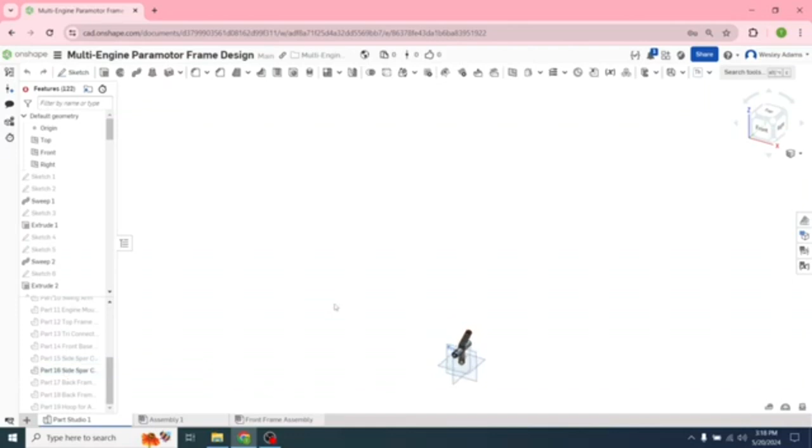Before we do the back frame assembly, let's go back to Part Studio. Let's go down, side spar connection still activated. We went in and changed where the bolt holes were last time. We're going to keep that, but I noticed that the color was off, so we're going to go Edit Appearance.

Let's change that to black, and when we go back to the front frame, you'll notice that all of these parts are now black. So this is just showing that if you change something in Part Studio, it will automatically update in Assembly View, as long as you've saved those changes here.

Let's right click on this, on Assembly 1. Let's go Rename. Let's go Back Frame Assembly.

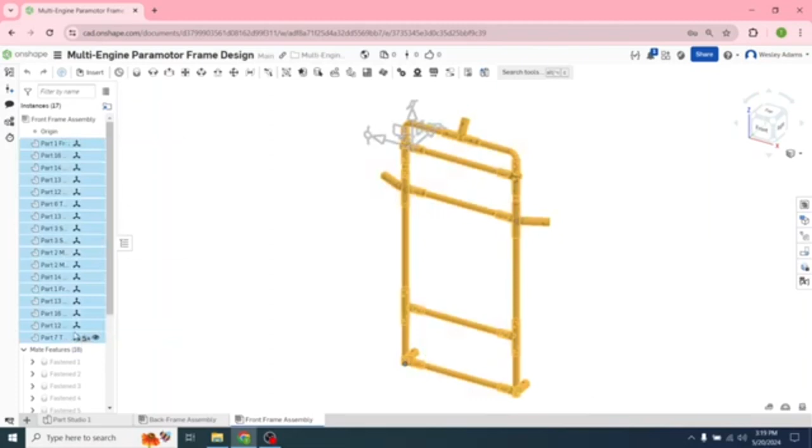Now left click, highlight all of these parts. That's one way to do it, or you could highlight over in the features. We're going to right click, copy 17 items. We're going to left click on the back frame, and paste the 17 items here. I want to be able to go back and create drawings just for the front frame, and I don't want to have to replicate the work. So we're going to save that assembly where it was at.

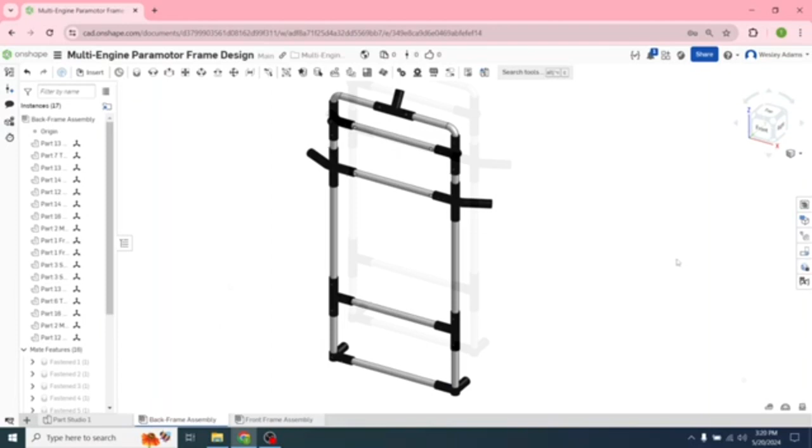So now we're going to build the back frame. Let's go Insert, Right View. Scroll down, and let's find the back frame tube. Let's just start with that.

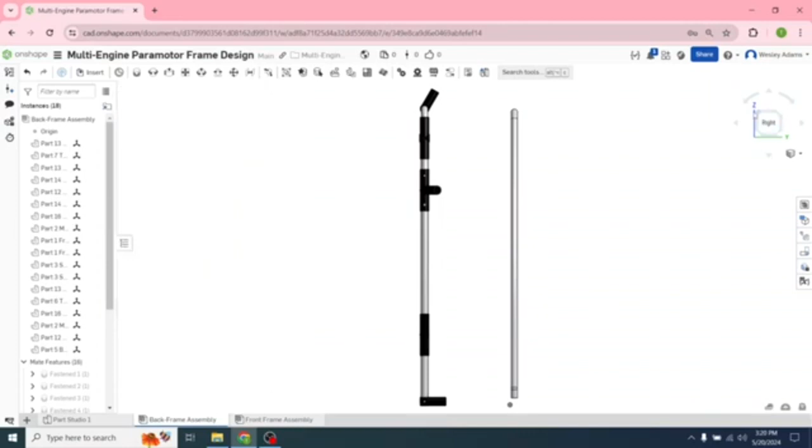Left click to insert it, close out the Insert tab. I'm just going to pull this over. Left click, holding down, now I'm going to click on that. I'm going to rotate 90 degrees. And I want to go back, right click, let's go to Isometric View.

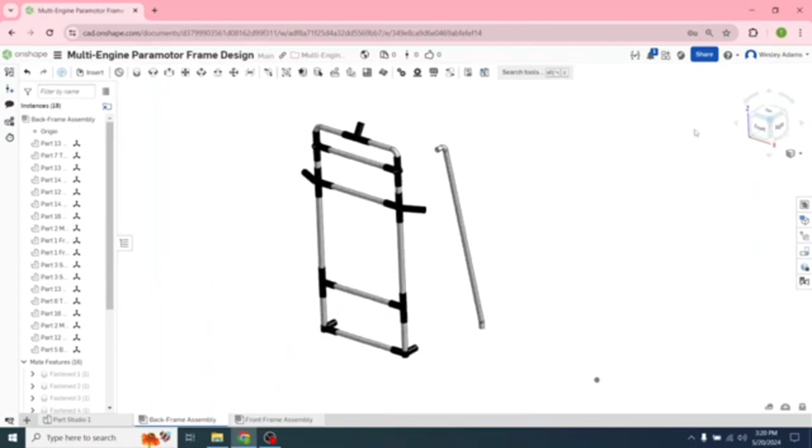Let's left click on the Fasten mate. Left click here, because we want that part to move to the frame. Left click here, and that should insert. Let's go over and see how far - yeah, so that's good, insert.

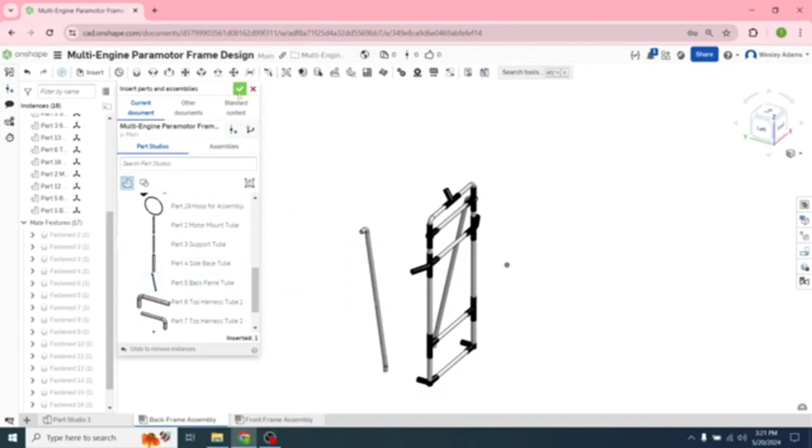Let's go back down, find that part again - back frame tube. Let's insert here, close that out, go to Top View. Drag that over. Left click on it, let's go 90 degrees. Close that out, yeah let's do it from here.

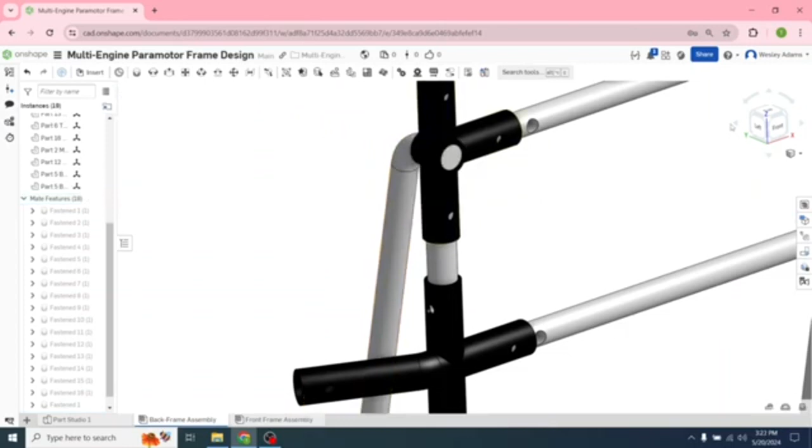Let's just try that without going in. Left click here, left click here, yeah, that's what we did. Close that out - that goes all the way up to where we want. And when we look at it from this side, you'll notice that it is where we want it to be.

We're going to go back in and change the length of this here in just a second. So let's go to Part Studio. This will be good practice to change parts.

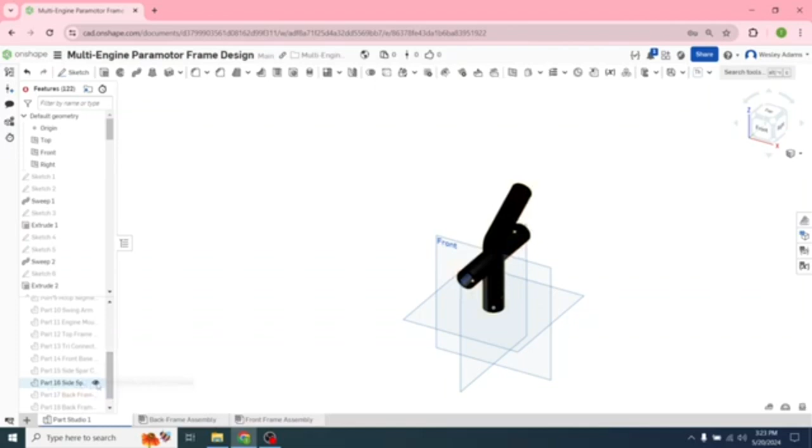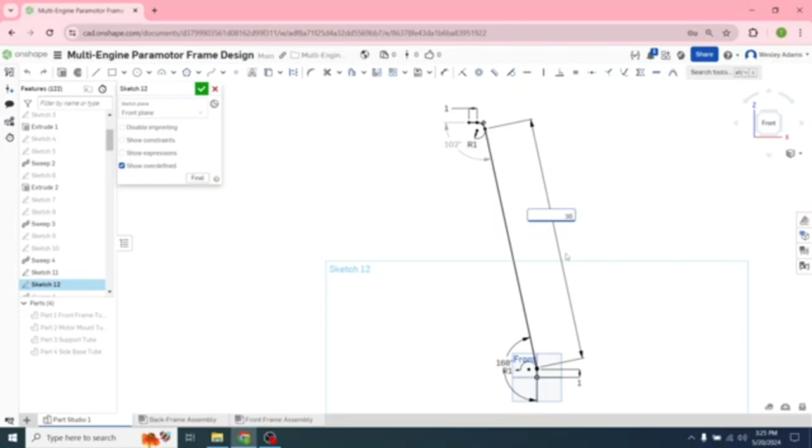Let's turn that one off. Let's go back up here to the back frame tube. Let's turn that on, highlight it so we can go and find the sketches. All right, there's our sketch. Let's go to Front View. We're going to change the length here to 30.75. Close that, let it save.

Back frame assembly - and that looks like that's just about touching the ground.

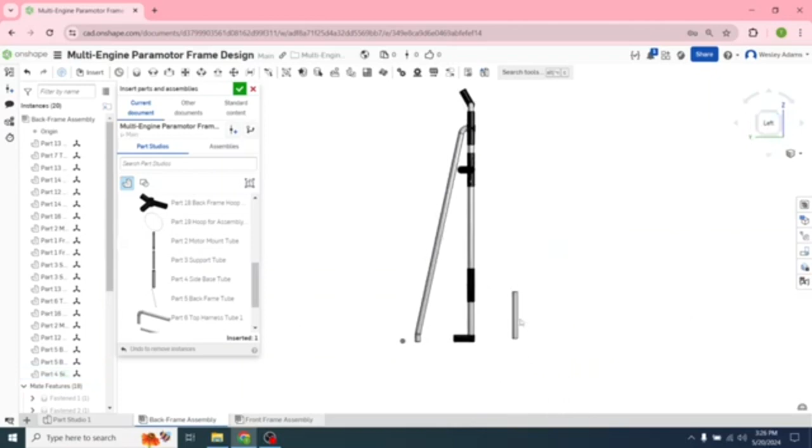Okay, let's insert this side base tube. Let's go Insert, let's go down and find it - side base tube. Let's bring it over here, Left View, bring it up here. Let's left click on it, close that out, left click. Rotate, let's go 90 degrees. Let's bring that over, let's go to Isometric View, zoom in so we can have a good look.

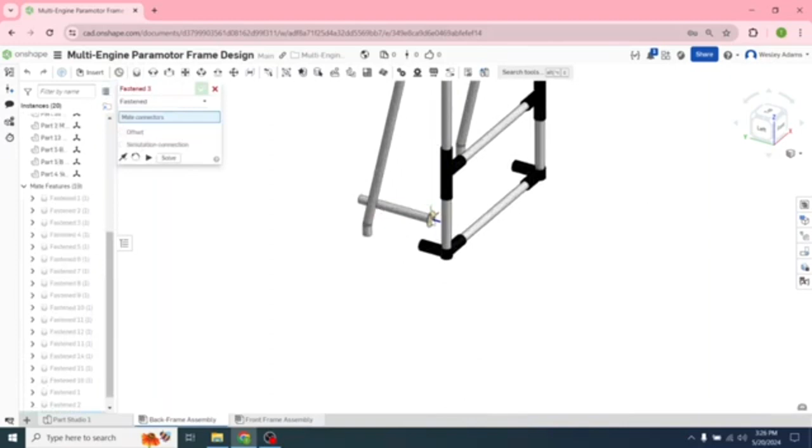Left click on the Fasten mate. Left click here, left click there. We're going to have to adjust that, so let's do our offset on the Z axis - 2 inches for now. Yeah, that's pretty good.

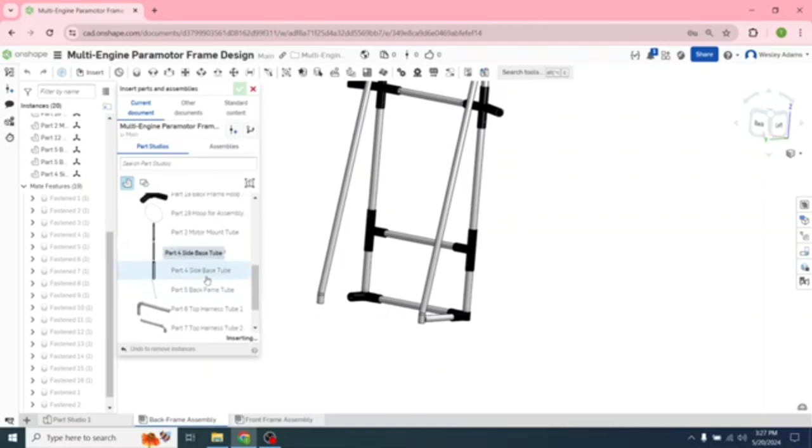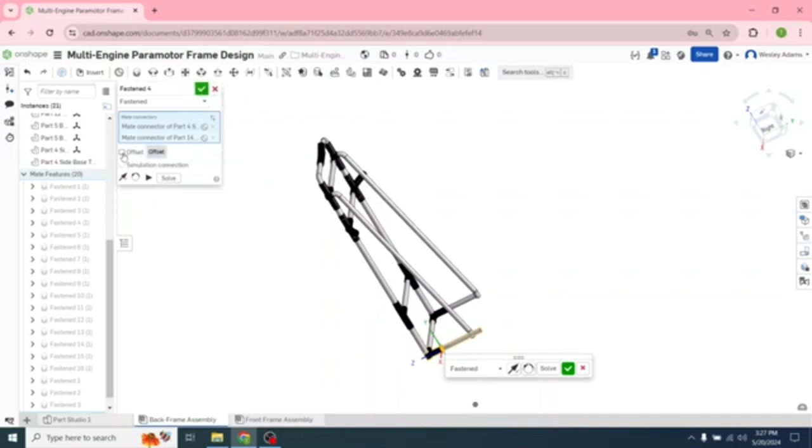Let's go insert, let's go side base tube again. Bring it in, close that out, rotate around. Let's go to right view so we can rotate it - rotate 90 degrees. Left click, bring it over here. Let's go back to isometric view. Left click, fasten mate, left click here, left click there. Let's go Z offset to 2 inches. And we've got that - all right, so it's starting to set up nicely.

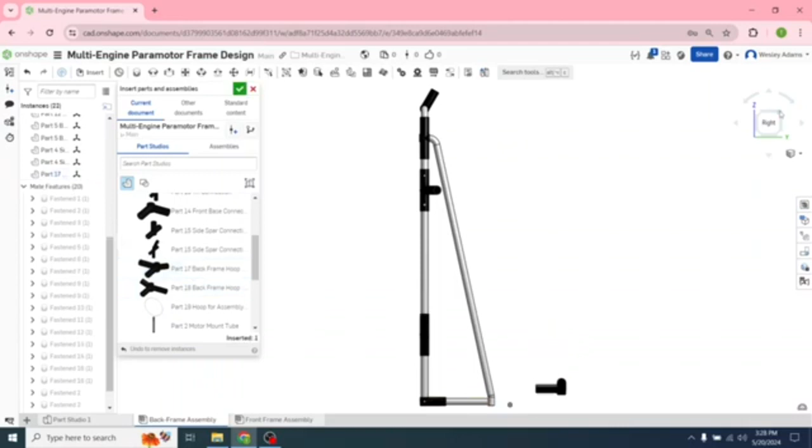Let's go insert. So one of these has to be on the left and one has to be on the right, so let's set this down. Close that out, go over. All right, this one is going to go on this side. So let's go to isometric view, let's just move it over there a little bit closer.

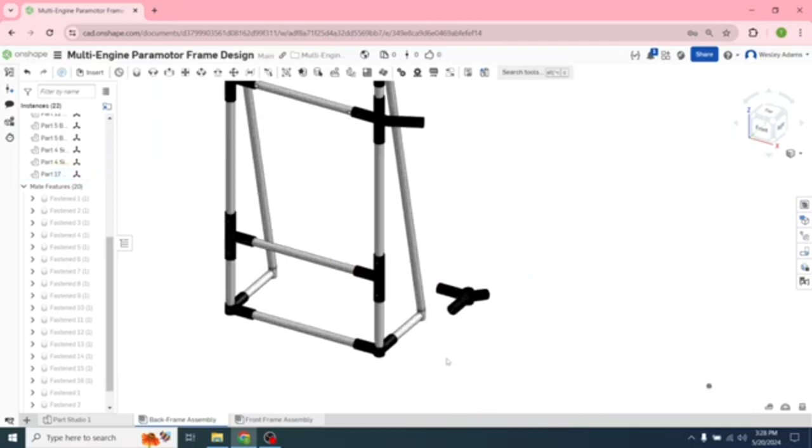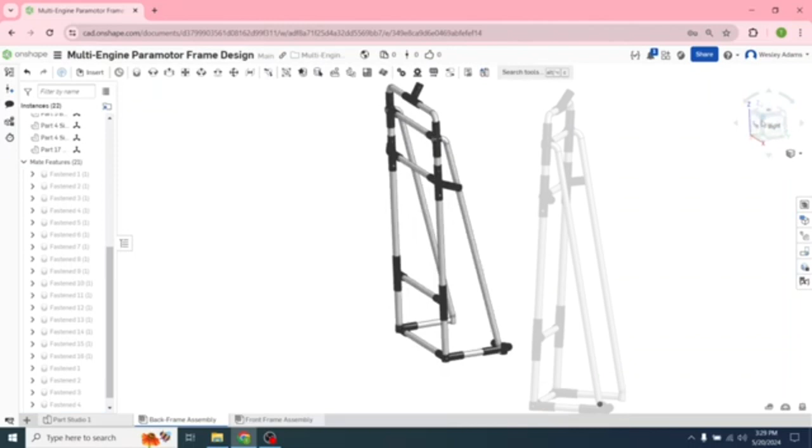Left click there, left click here. Turn that back frame tube off so we can see it. No, we got it there. So let's do our offset at 2 inches. And now let's see how everything's lining up - Top view, zoom in. Yeah, so we're going to shorten that tube.

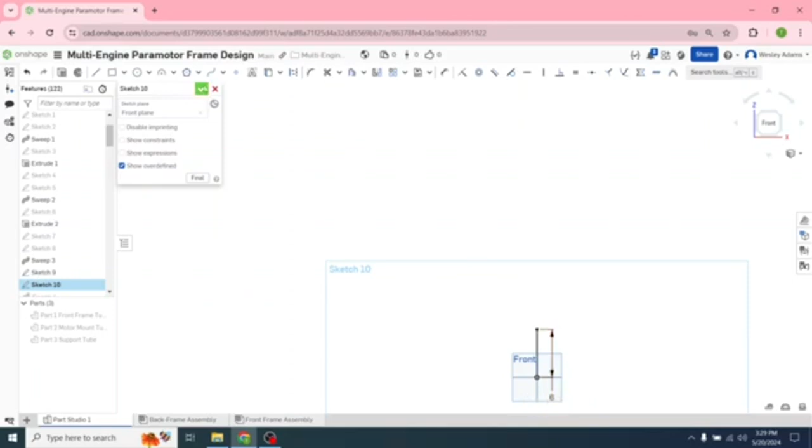Let's go back to Part Studio, let's go to our side base tube. Let's go 6 inches - it was 7. Let's see what it does there. Still saving. Let's go back to the back frame.

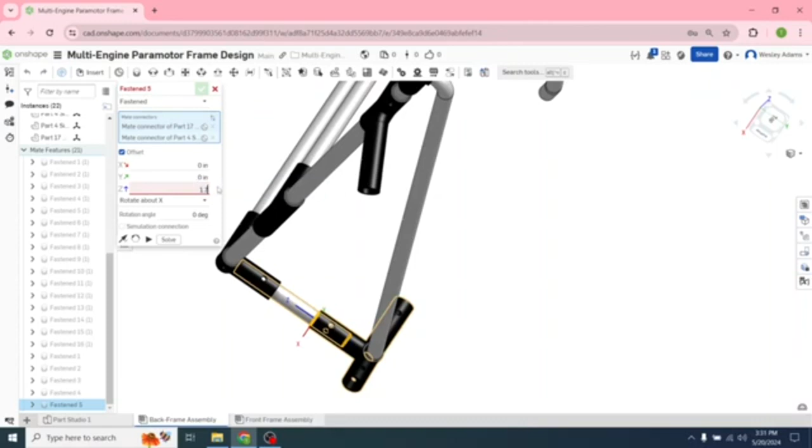All right, so that's pretty good. Move that just a little bit more - let's go 1.70. Oops. And now let's look and see - that one's fitting where we want it to be, and so we're going to do the same thing over here.

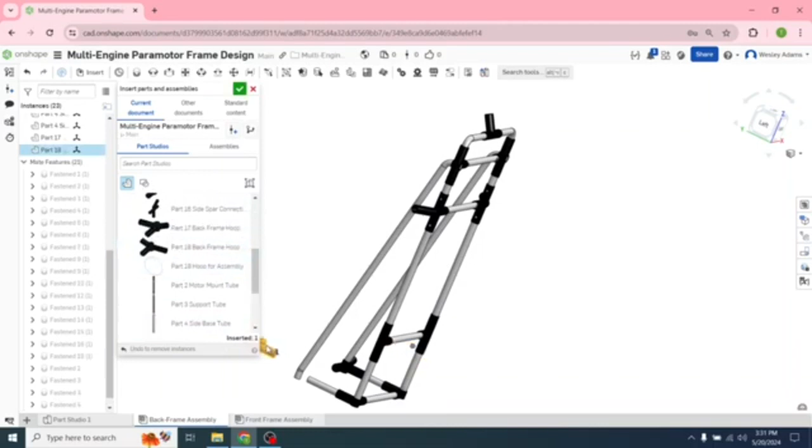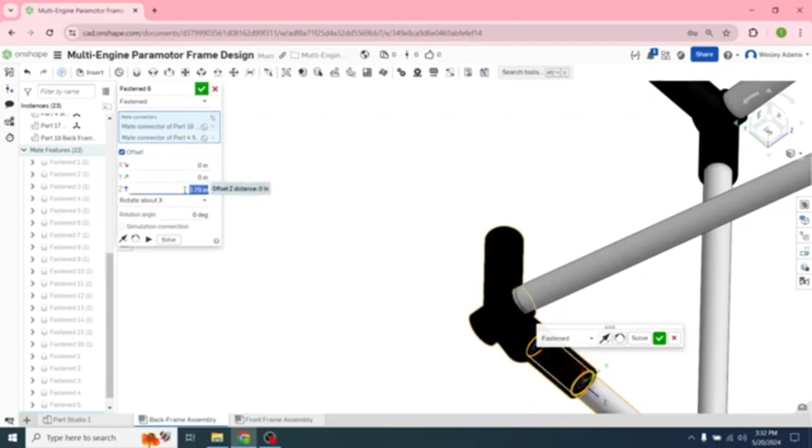That automatically changed to 6 inches. So let's go insert, and let's go down - let's do part 18, it has to go on this side. Let's move it over. Left click, fasten mate. Left click here, all right let's do our offset - 1.70. Close that out, and that should - yeah, so we've got those in.

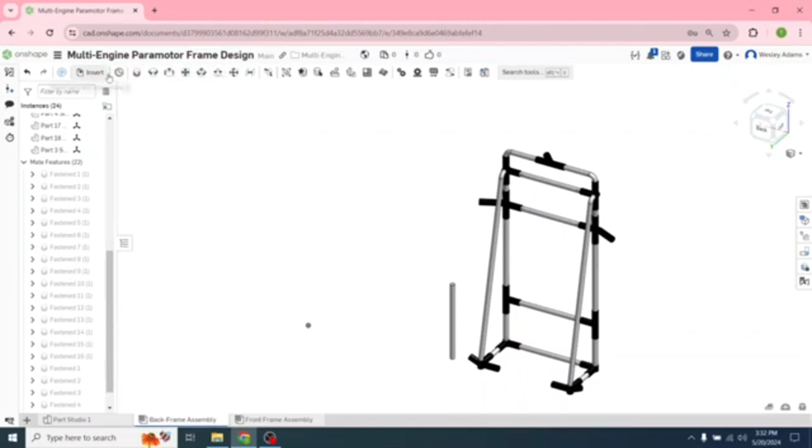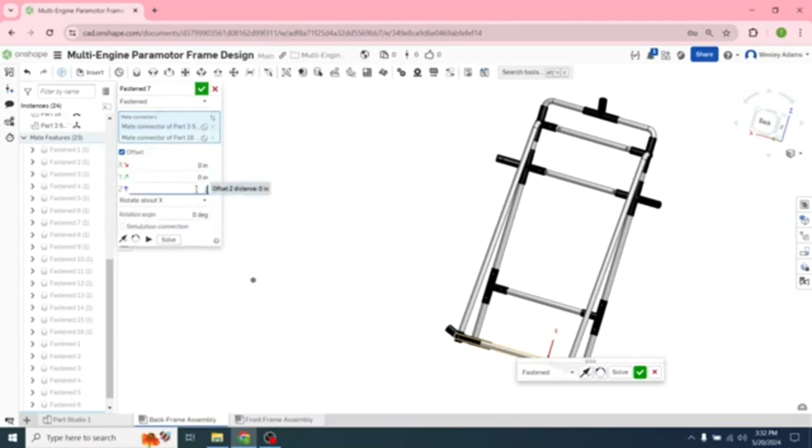Now we're going to do a support tube here. So let's go back, let's go insert, scroll down, find our support tube, let's place it in here, close that out. Let's left click on that, I'm going to go to back view. I'm going to rotate that. Left click on the end here, left click here. Let's do our offset of 2 inches - Z offset 2 inches. Close that out. And let's see how that looks - yep, so we've got the base.

So in the next video, we're going to complete the full frame assembly, get everything lined up. If everything matches, then we'll go ahead and do a small scale assembly next.